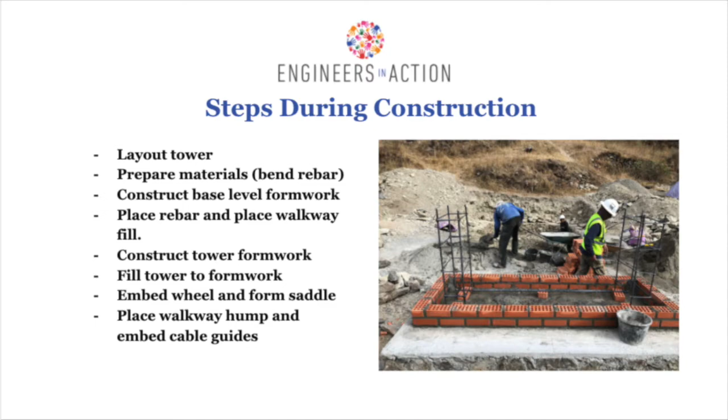The necessary materials for this part of the process will be cement, sand, water, and gravel, as well as CMU or bricks, whichever you're using for formwork, cables, tubing, reinforcing bar, saddle wheels, and tie wire. The recommended tools are shovels, buckets, circular saw or angle grinder, masonry tools, as well as a level, plumb bob, and string line, construction square, measuring tape, something for cutting and bending rebar, spray paint, and wire cutters.

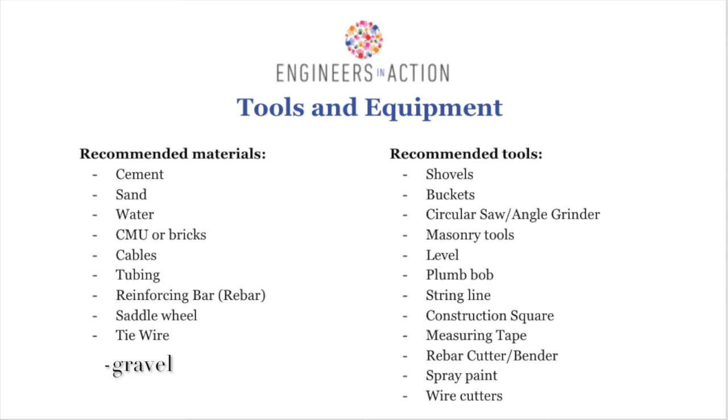The PPE you should be wearing during this process should be the normal PPE you're wearing this whole time. In addition, during rebar prep and assembly, make sure to be wearing gloves, but not if you're using the angle grinder so they don't get caught, goggles or safety glasses, hearing protection, and then long pants and steel-toed boots. During the cage movement, you should be wearing all of the above and make sure that your hard hat is well secured.

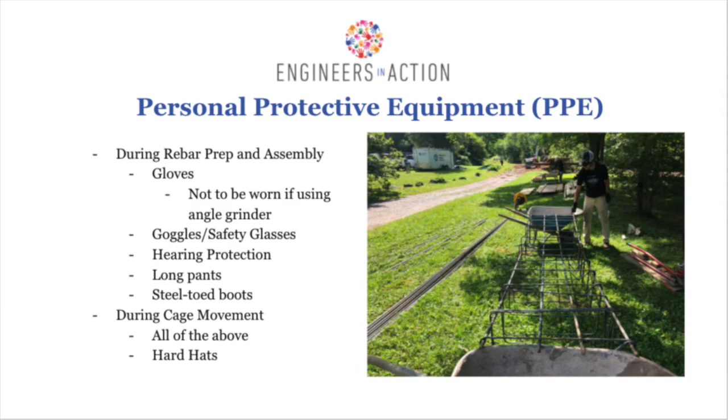First, we'll want to lay out the tower footprint on top of the final tier, measuring from hard points such as already built foundations or tiers, and using the string center line and a plumb bob to make sure we're centered and square.

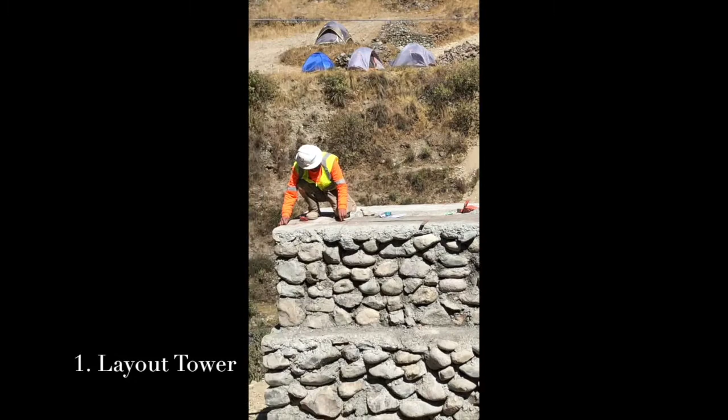Once we have our measurements, here in the video, you can see the masons are using a red chalk line to lay out the footprint of the tower on top of the final third tier.

Preparing the rebar cage can be done after or concurrently with preparing the tower plan on top of the final tier. What you want to do is take the already bent stirrups and alternate the bent corner. There should be 4 corners and 4 stirrups, one for each side, as you slide them over the U-shaped bars. You'll use tie wire to hold them into place.

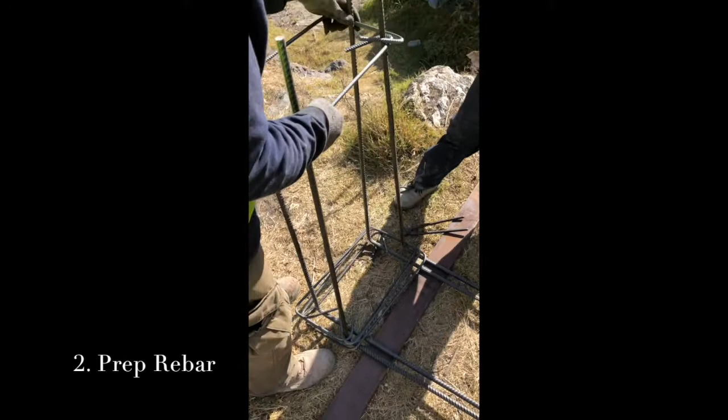It's helpful to mark beforehand where the stirrups will be resting with a Sharpie marker or any sort of string you may have. You want to double check the dimensions to make sure the tower rebar stirrups are in the correct long direction and short direction. And finally, you'll carry the rebar cage to the tower and place it inside the formwork when that is complete.

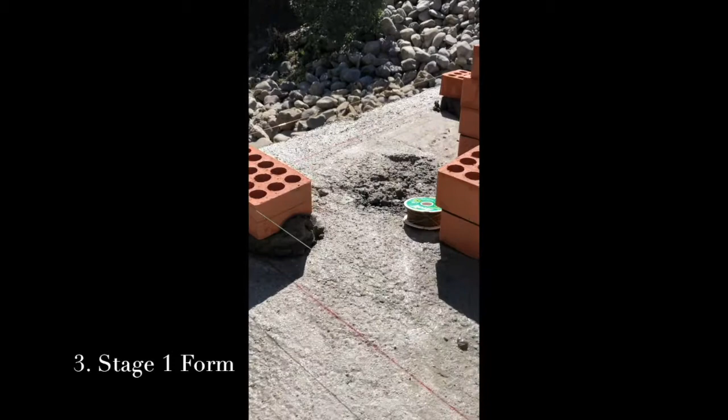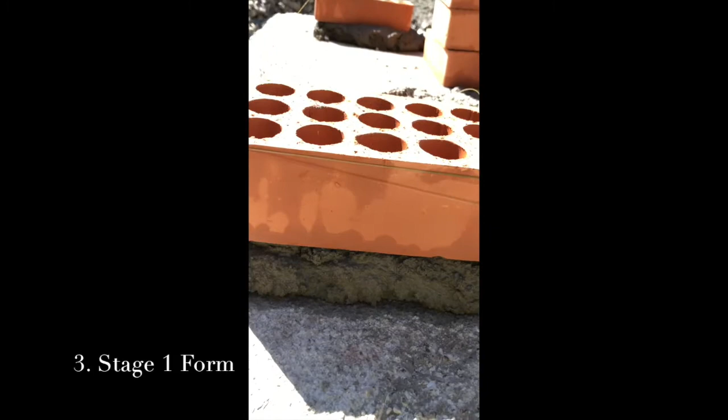The tower is beginning. We're using fishing line to mark the perimeter, and single bricks in each corner with grout or concrete are used to hold the fishing line in place. That marks the perimeter of what the tower footprint will be.

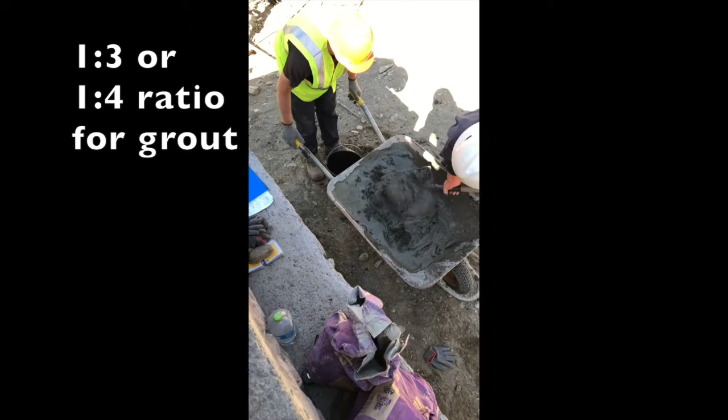1/3 bag of cement and 1 wheelbarrow of fine sand.

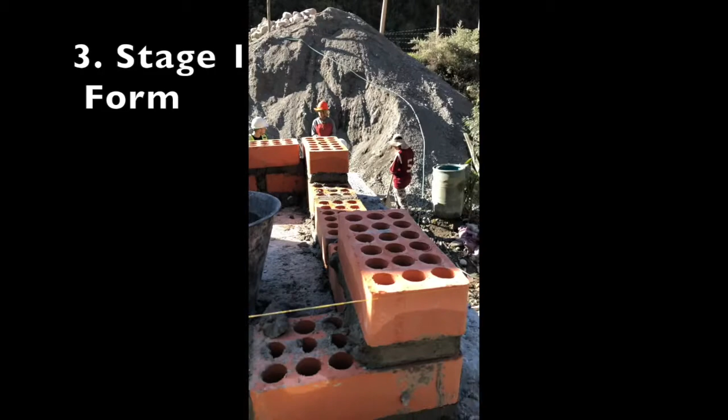So, we are doing 2 layers of brick. That should be 20 centimeters, and that will be our stage 1 in our tower construction drawings.

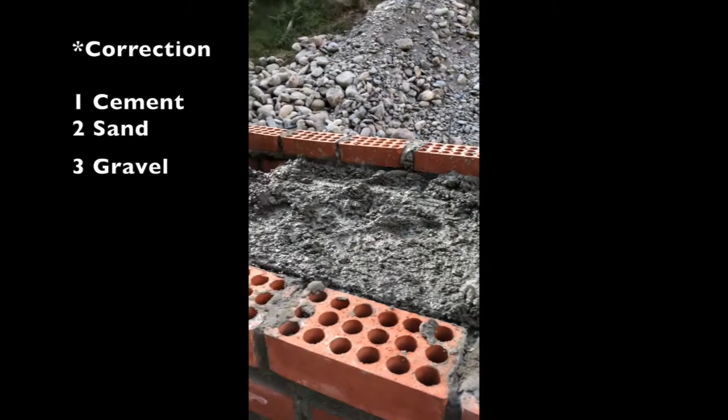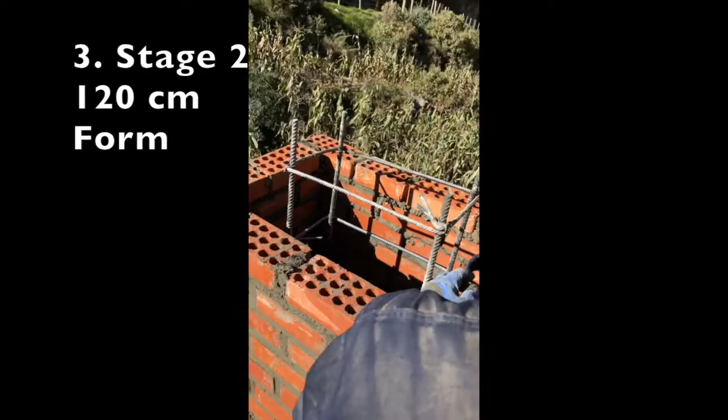The masons are using levels, this iron bar or tin bar, filling the inside with grout, and then cleaning the outside with a special tool.

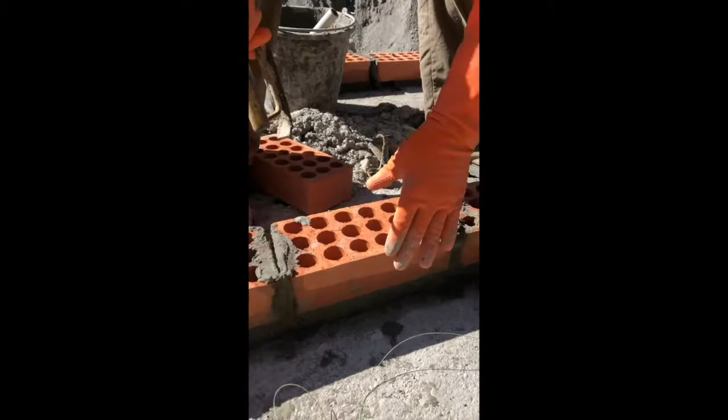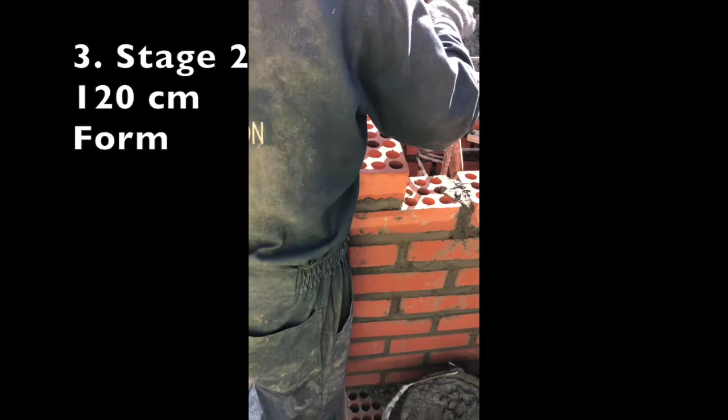They also use a plumb bob around the outside to make sure the wall is plumb. And then the first brick that's set on the wall is set plumb with the plumb bob, and then this tin bar is used to make sure everything is in line with that brick.

Bricks are broken just with these scooping tools in order to be shaped to size. Hence where some contingency is needed in the bricks. It's not always going to be exact.

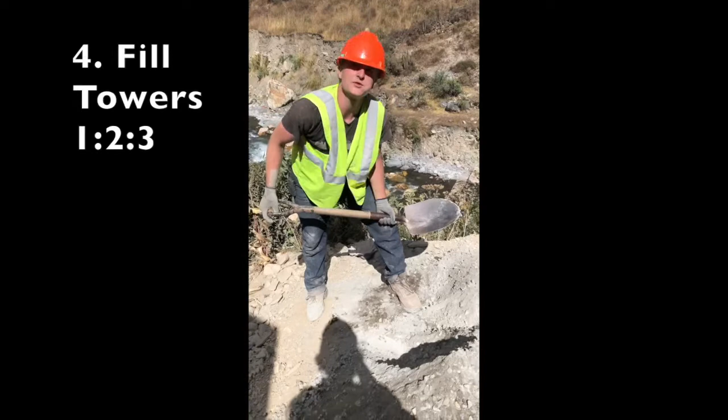So we're here doing the mix for the towers. It's 3 parts gravel to 2 parts sand, fine sand, and 1 bag of cement. We first mixed it this way, then we're going to mix it back so it's all together. After that we'll make a volcano, just like our other mixes, and fill it with water, and then mix it until it's nice and workable.

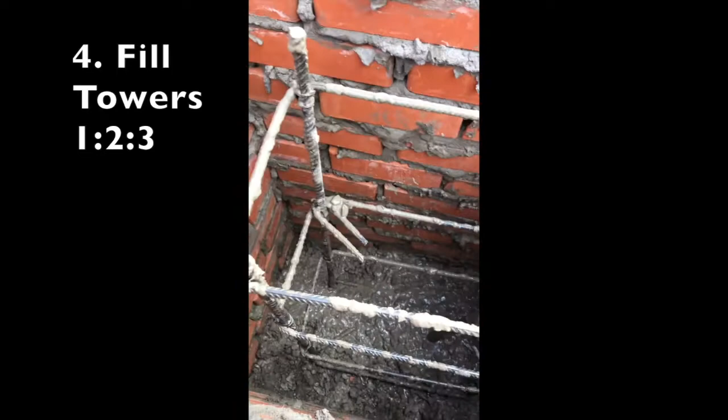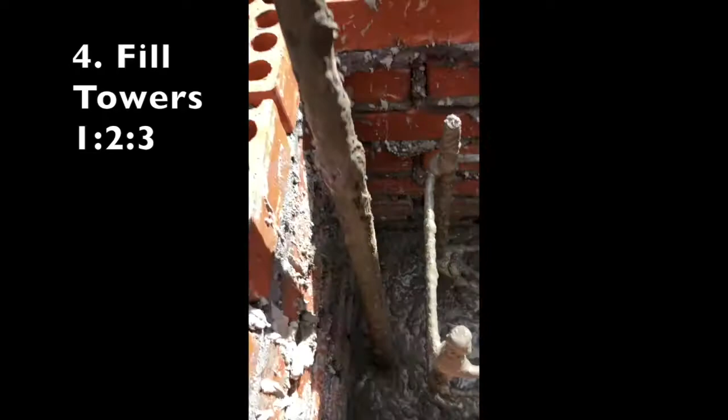So we're passing 3 buckets, alternating towers, 3 buckets of mix, 3 buckets of mix after wetting the bottom. Okay, and so at this point we're filling up the tower, and I am using this stick as a ramrod for getting any entrained air out of the concrete as we pour it into here.

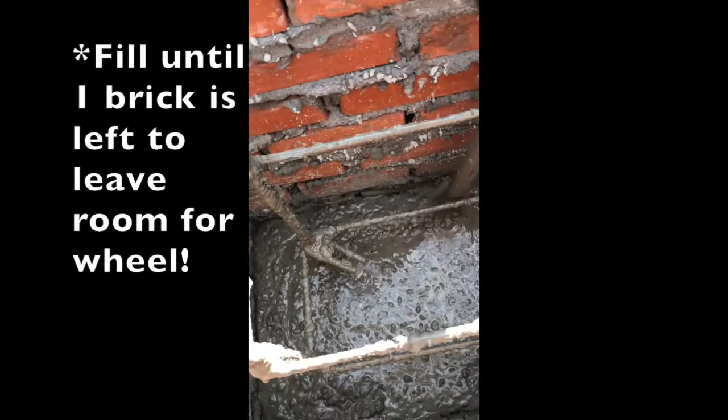And I am keeping track, counting bricks to make sure that we're not filling one tower faster than the other. We're trying to fill them both at the same time so that they dry at the same time.

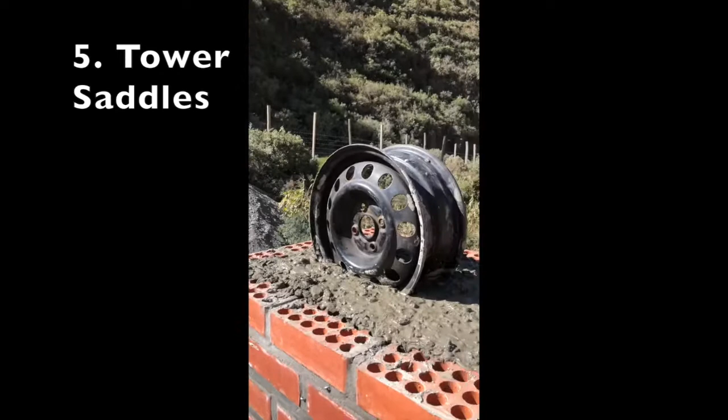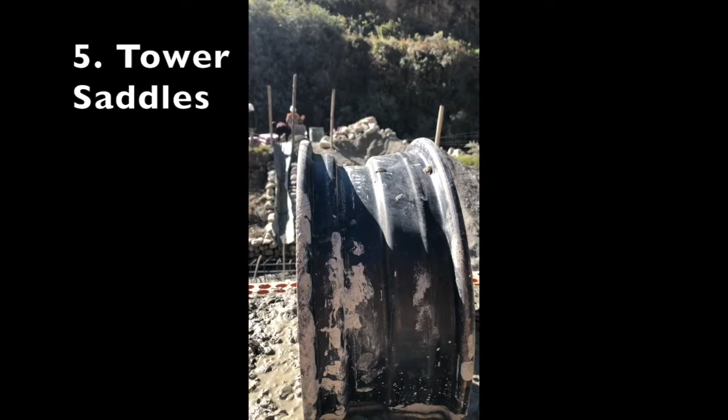We leveled the tire rims to each other, and then measured that distance down to be 154.5 centimeters. 3.5 comes from the fact that the cable actually sits lower in the rim, 3.5 centimeters lower, and 1 centimeter extra to account for the settling of the concrete over time here.

And that's within tolerance of 150 centimeters. If it ends up being half a centimeter off, that's all right. Just making sure everything's plumb, level, square before we let it set. And then we'll form the saddle shape.

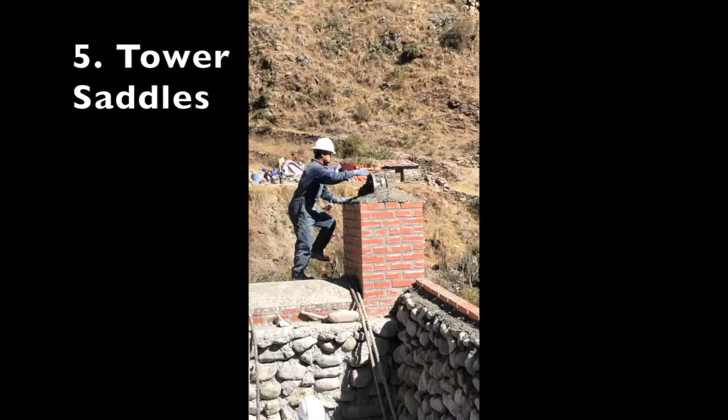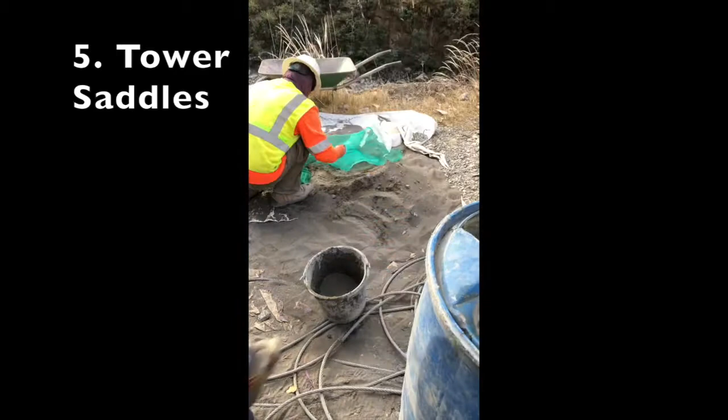After forming the majority of the saddle shape with a stronger concrete fill, we'll use really fine sand, even filtering the fine sand that was delivered on site to form the nice, clean aesthetic of the tower saddle.

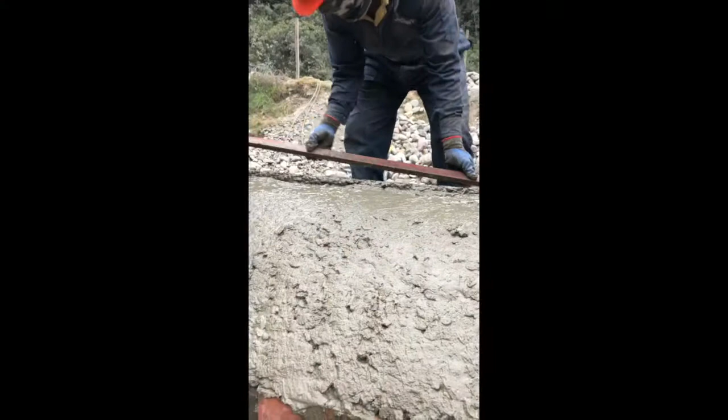Finally, in a similar fashion, we'll form the walkway saddle, and we'll embed the small pieces of rebar that serve as cable guides before taking our final quality control photos.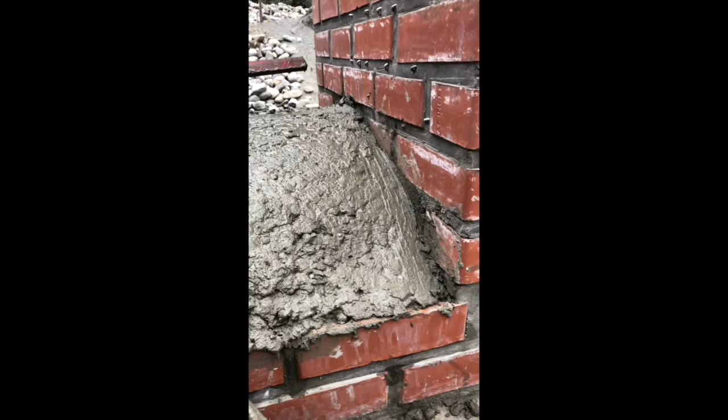We want to do our walkway last because we'll be stepping all over this area when doing the tower saddle, so it'll be nice and cleaner if we do this as the final item before eventually taking our quality control photos, following the quality control forms, and laminated cards.

And thank you for watching this video on tower construction. As mentioned, you can always find more information in the Bridge Builder Manual or on the Bridge EDU course.